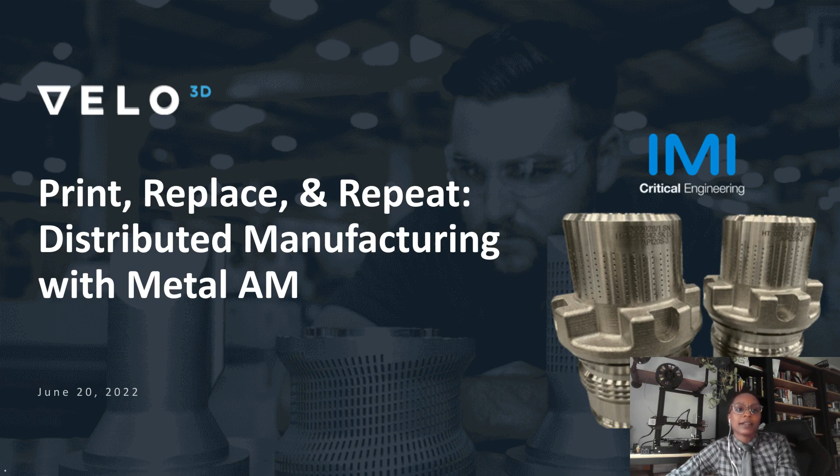Okay, so welcome to Distributed Manufacturing with Metal AM. The three main things that we're going to cover today are: number one, what's required for distributed manufacturing; number two, a quick overview of the Velo 3D products; and then in the second half of our presentation, Sid is going to talk to you all about a case study around this specific application.

So printing the same part twice is really deceptively easy. It's actually a more challenging thing than most people would think to consistently repeat the same part exactly from machine to machine and location to location, and then to also take that consistency and scale it on a massive fleet of machines. So if it's that challenging, how are customers expected to be successful in serial production? And from serial production, that's how we gain more industry-wide adoption.

So first, I want to talk about standardization, where the focus is really around part repeatability. So there's two ends of the spectrum for standardization. Number one is the industry level. So that relates to standards developed by industry bodies like SAE, ASTM, SME, those types of things. And then there's also the manufacturer level standardization, which refers to more site-specific standardization. Think more along the lines of vertically integrated OEMs or your local contract manufacturers that have some machines.

So this manufacturer level standardization tends to describe workflows and processes that allow you to make the same part repeatedly. And when we refer to manufacturer level standardization, a lot of the times people tend to think about the QMS that a lot of these industries use to execute these manufacturing workflows. So the site-specific manufacturing certification is really challenging due to the architecture of a basic laser powder bed fusion system. This more traditional architecture allows for a lot of variability because it's very operator dependent.

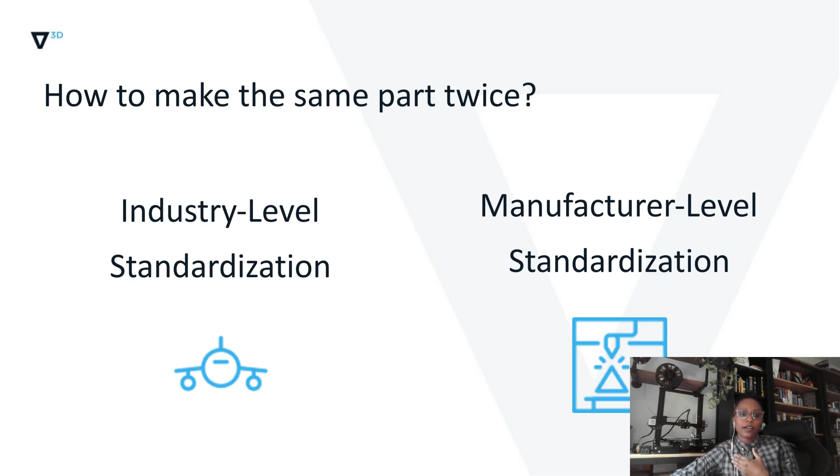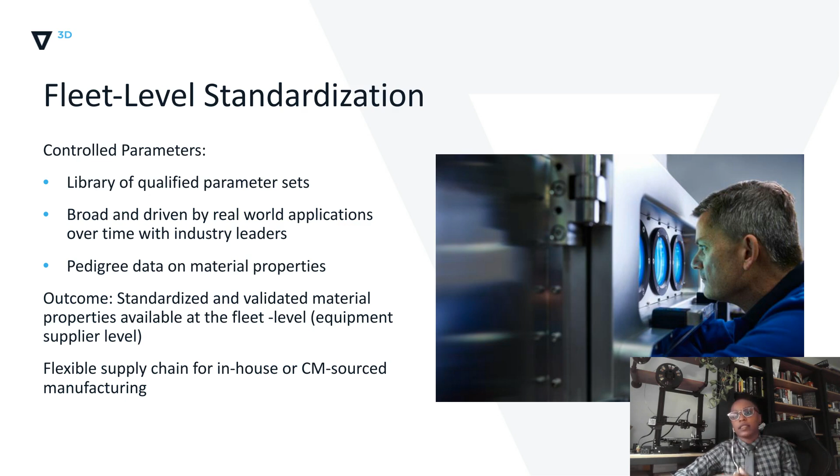So we focus a lot on fleet standardization. Fleet standardization falls somewhere in between industry level and manufacturer site-specific level. It's a system from the ground up that creates an architecture specific and designed for serial production so that we can repeat our parts over and over consistently. One of the ways we do that is using controlled parameter sets - revision controlled parameter sets as opposed to an open architecture that allows you to change and develop and tweak things like laser power and speed. With that controlled parameter set, you get material validation that we also provide, and because of that, you're able to print a given part, the same part, no matter where you go.

We have a golden build file, which is essentially what we provide. So if you come to us, we create the golden build file, or you create your golden build file and we've checked it and certified that it's good. That golden build file is just a set of instructions that can be distributed to any of these Sapphire systems geographically and executed to deliver the same end result. This gets you a lot closer to standardization than what you can get with an open architecture system where you're allowed to play around with those parameter sets.

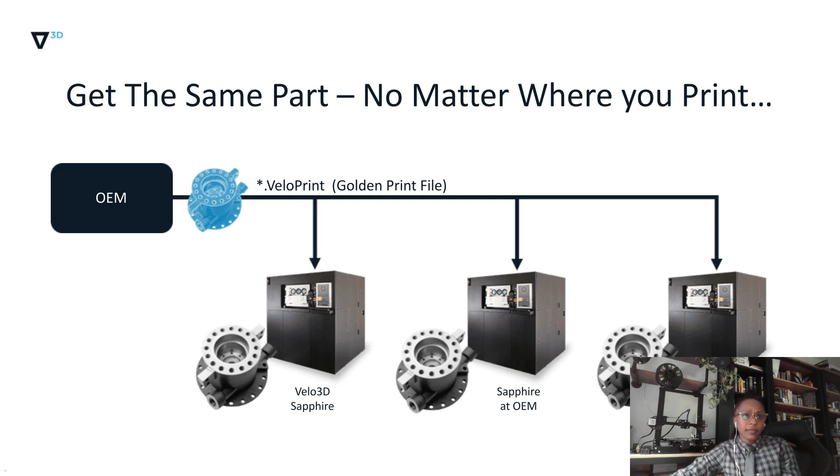So we brag that we provide the end-to-end solution, and I just want to clarify that we provide the end-to-end printing solution. At our core, we are a process company, and that's how we've developed our capabilities. We've developed 3 tools essentially to make this process work. Number 1, you have our print preparation software. Number 2, you have our Sapphire tool. And number 3, we also offer our Assure quality validation software.

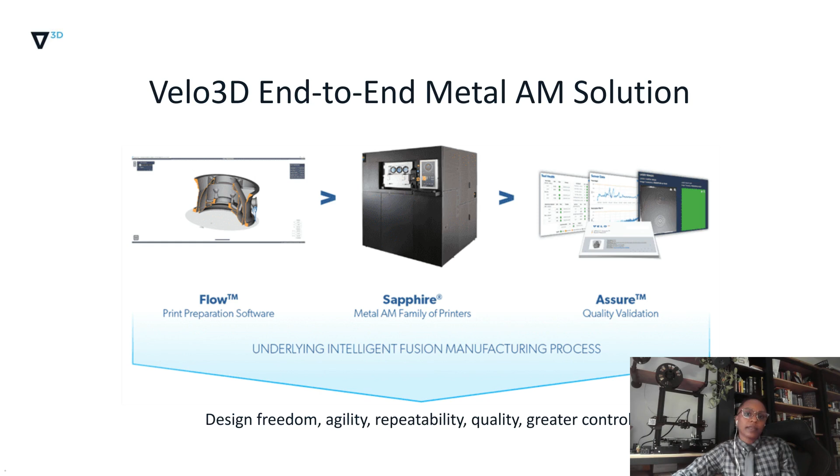For the Sapphire printer family, we are a manufacturing technology company that was founded in 2014. We're also listed on the New York Stock Exchange. The Sapphire printer family is currently composed of the Sapphire, which is the normal size, and the Sapphire XC, which stands for extra capacity. I'm happy to say we now offer both of these in the 1 meter Z build height. The Sapphire family of printers all use the same software, run the same processes, and use the same materials to ensure repeatability and consistency across our fleets. These machines were made with serial production in mind.

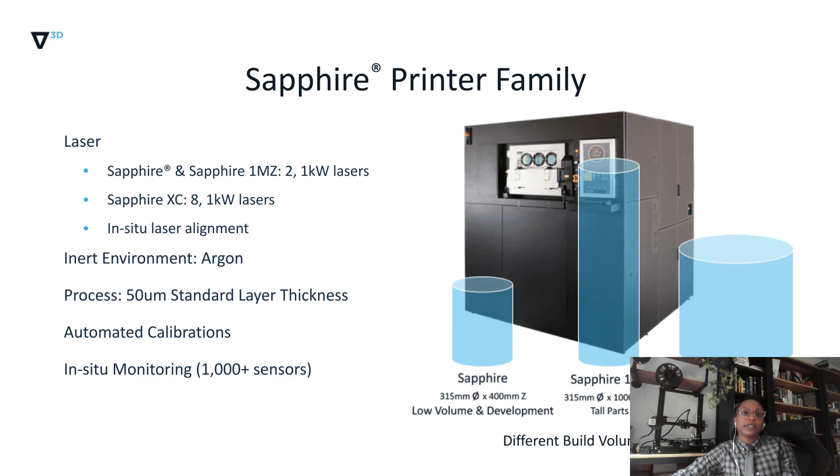And so speaking of materials, most of our material releases have been driven by our aerospace and defense customer base. We've been very focused in the aerospace and defense sectors, but we've seen applications start expanding into heavy industries like oil and gas or power generation. And that's where this upcoming case study is actually focused.

So in the heavy industries, we're seeing a heavy reliance on distributed manufacturing for maintenance, repair, and overhaul of their systems. The valves in this case study are a really good example of how you can leverage the distributed supply chain, printing geographically anywhere in the world. And with that, I'm going to hand it over to Sid.

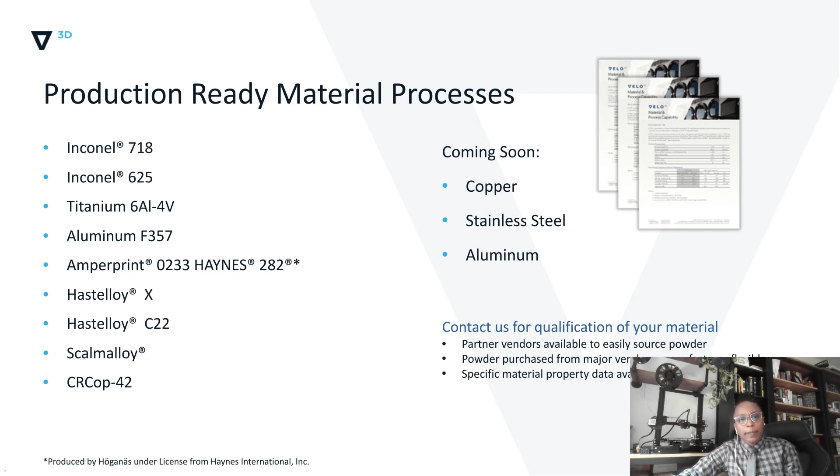Thanks, SJ. I am going to take a moment and take control. All right, so it's great to be here. Thanks for making the time to drop in on the webinar here. I'm excited to get into this.

As SJ mentioned, I will be talking a little bit more about a case study that illustrates this concept of distributed manufacturing. And the way that we'll do that is we'll talk about a specific application that we've worked on with one of our customers, IMI-CCI in this case. The part here that we looked at was the multi-stage trim valve. Essentially, that's what you're looking at here in this photo, and we'll talk through that as a case study on our distributed manufacturing topic.

So a couple of things about this multi-stage trim valve. The component itself is extremely unique in that it is a cylinder of metal, and it has, as you can see, a lot of tortuous paths that go from the ID of the part to the OD of the part. Essentially, the paths provide good flow control in some very demanding oil and gas applications. You have a very large required pressure drop across the part, and you need to be able to meter or control flow or fluid through this valve without having extremely high velocities that result in things like erosion, vibration, and noise. The way that works is this component has a plunger inside of it that blocks and unblocks different levels as it moves through the paths so that the fluid can flow from the ID to the OD.

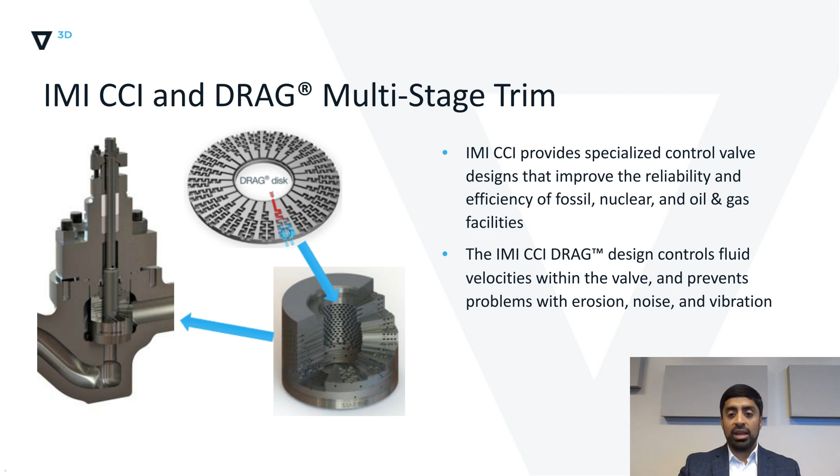When you think about the legacy manufacturing process for these valves, in traditional manufacturing they're manufactured as disc stacks. So basically what you're doing is you start with a circular hunk of metal and you're either milling or plunge EDMing these paths into your discs. And then once you have a series of discs, you line them up and you braze a stack of these discs together to create a full part.

As is the case with any manufacturing process, there are some pros and some cons. On the cons side, when it comes to brazing, there can be challenges during post-processing as well as during operation in some pretty demanding environments. As far as the pros go, these parts can be highly customizable, so the flow paths on the internals are optimized and dictated by very specific applications intended for different fluid viscosities, different pressure drop requirements, and things like that.

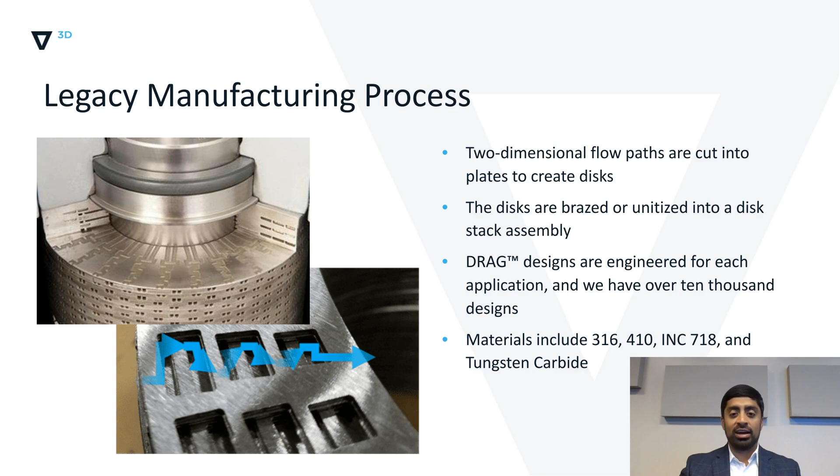At the end of the day, as you describe this part, you start to realize what unique aspects make it a great AM candidate. For one, we see benefits when you go to AM with this component because you eliminate the brazing process, which can be a potential failure mechanism that impacts and reduces the lifetime of the product. You can customize these further, maybe build some more functionality into the part at a reduced part price relative to its complexity when compared with a conventional manufacturing path.

And most importantly, you see a lot of supply chain benefits because there are a lot of these valves that have unique flow paths for different applications. When you start to think about stocking them, that becomes a big challenge because this is a low volume, high mix part that you basically need to stock for each unique geometry that's out in the field in service.

And so this is exactly the reason why this part is a great case study for us, Velo3D, as well as our customer, when it comes to examples of how AM, and specifically Velo3D, is enabling these concepts we talk about related to digital warehousing and distributed manufacturing.

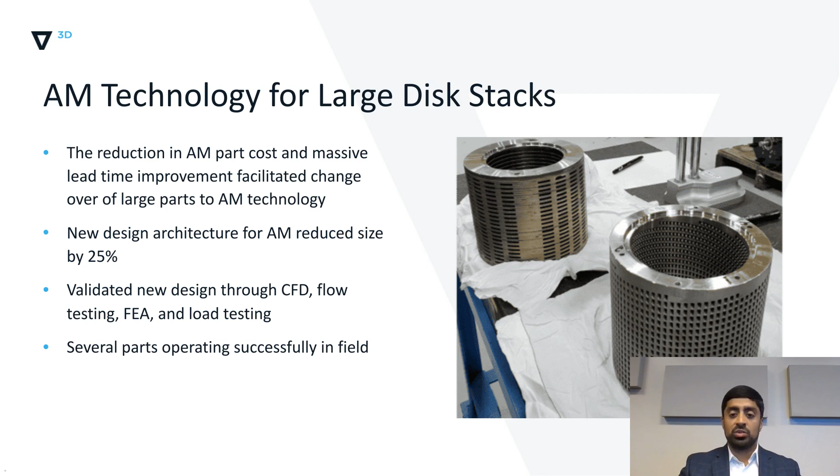With all that said, in terms of the great things about AM and the benefits, you have to talk about certification challenges. Production implementation isn't as easy as just printing a few parts. When you transition from a conventional manufacturing process like brazing to AM, that comes with its own unique set of challenges. One of the major challenges for AM specifically, when we talk about the heavy industry space, is that the requirements and the bodies tend to be very conservative.

Personally, I come from an aerospace background, so I am familiar with that flavor of conservatism. But these requirements, I have realized, are quite different. In this industry, the geometries may not be overly complex, but the operating environments are extremely challenging, including prolonged exposure to hot and corrosive chemicals like hydrogen sulfide. Because of that, these types of requirements have already been considered and vetted deeply in this industry, and now you have to reapply all of that to AM.

So not only does the performance need to be tested, but we need to thoroughly vet our mechanical properties in order to qualify this part for service.

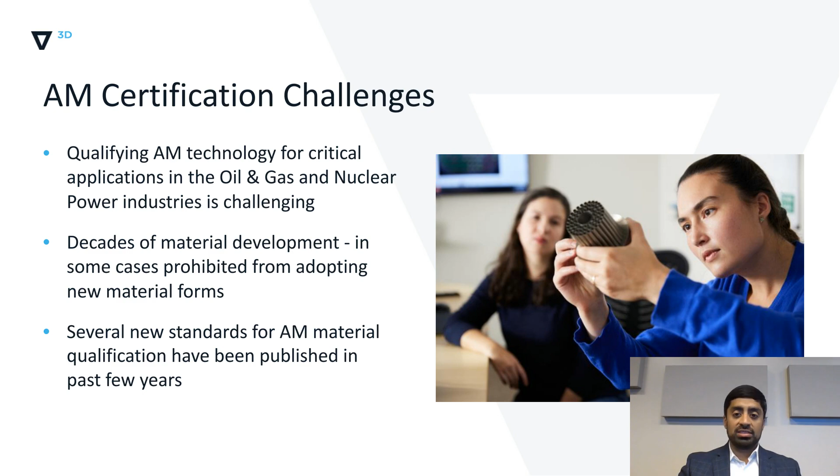As I mentioned, we worked with IMI Critical Engineering for this part to run through a complete qualification for one of these disk stacks. Keep in mind that this is an ongoing study at the moment. So we'll be sharing quite a bit today, but in the coming weeks we will be releasing some compelling data that speaks to the field performance of these parts over time, as well as the manufacturing process repeatability for these components when it comes to machine-to-machine repeatability at systems located at several contract manufacturers all over the world.

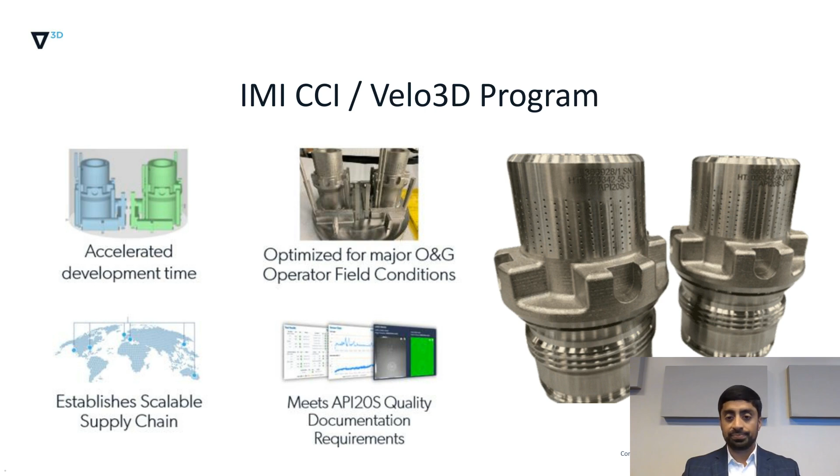So for this project specifically, we needed to meet our customers' requirements when it comes to the material qualification. In this case, it means the mechanical properties and the corrosion resistance of the material that we're printing.

The Sapphire qualification, or printing parts and coupons on the Sapphire platform per the requirements defined in API 20S, which is a standard released by API, the American Petroleum Institute, that specifies the requirements based on part criticality that need to be met in order to qualify the AM process for metal AM components in the oil and gas industry. And then lastly, part qualification, which means that the part performs and functions per its design intent for that application.

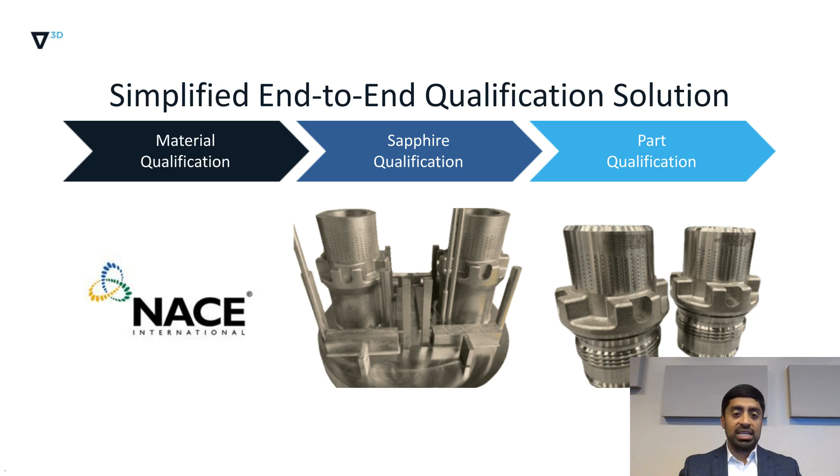So starting with the material qualification. One key differentiator for Velo3D is that we are committed to doing a lot of the mechanical and material property validation for our metal AM process and providing that to our customers free of charge. We want to provide control parameter sets to our customers that are printing real parts, not just test bars and test geometries, and these control parameter sets are tied to material properties that have been vetted by industry organizations that our customers rely on for qualification.

In this case, for our 718 process, we are working with our customers to establish compliance with NACE requirements, which govern a lot of the corrosion susceptibility for components and make sure these parts are well suited to withstand very harsh environments.

And in practice, how do you do that? The way we're approaching it is through rigorous amounts of corrosion testing. Even though there isn't necessarily an AM standard for NACE, we're fairly optimistic that by going through the same testing as a conventionally manufactured part, we can achieve that NACE compliance for our AM process. So we work with our customers to help define these test matrices and work through that.

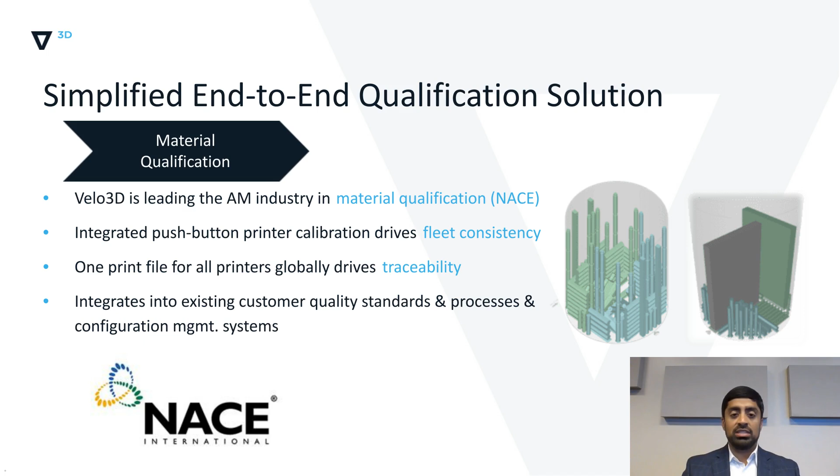Next, in terms of the Sapphire qualification, we worked with our customers per the API 20S spec to determine the criticality of this part and followed the appropriate requirements. So API, for example, API AMSL level 3.

Let me back up. API defines three different levels of criticality for a component. And the highest level of criticality, which essentially takes down a well or leads to a refinery stopping production, is AMSL3. That's the requirement you set in stone and start with.

In addition to the AM component itself, for one of the first times in a production context, we were also able to test the API 20S standards by going through the full validation of the feedstock, the print process itself, and the post-processing and testing, all three of which are critical to your qualification.

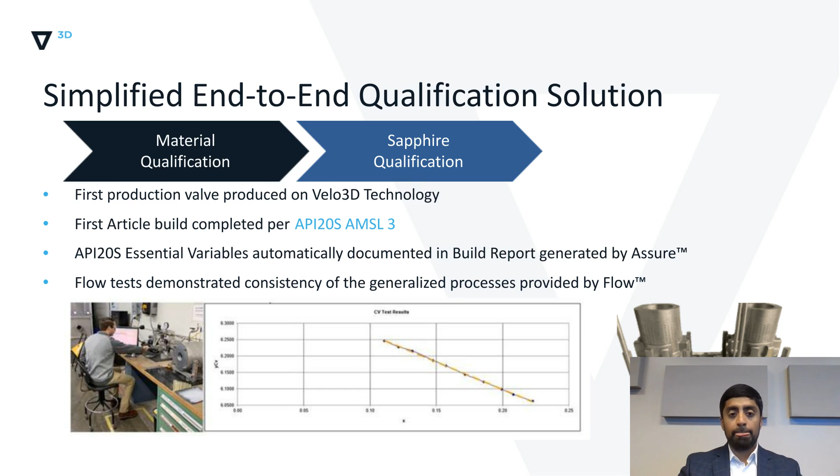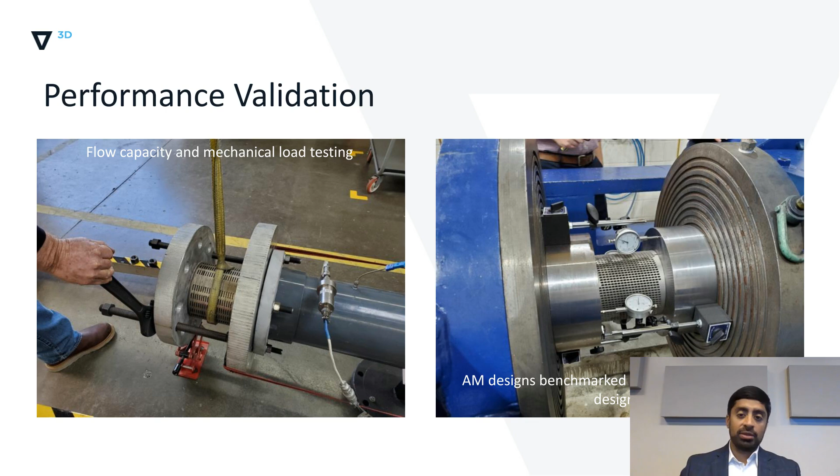One of the key enablers on our system that helps the Sapphire qualification is the Assure tool, and I think it's something we don't talk about enough. Assure is Velo3D's quality assurance and validation software, providing an in-depth look into calibrations, which is key for repeatability, especially with digital warehousing and distributed manufacturing. Our machines can self-calibrate, especially in the optical system, which is something we need.

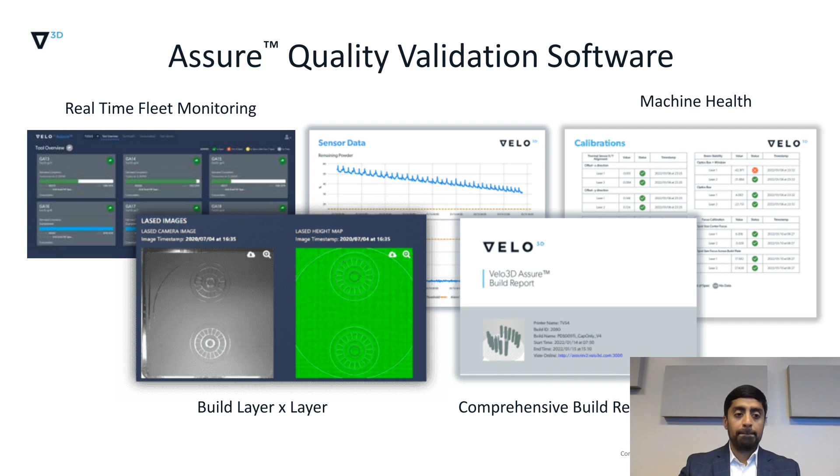Finally, in terms of part qualification, as I mentioned, the parts that we're seeing here are in production per API 20S. They're installed in wells and accumulating use. We've seen some good initial results in terms of nominal performance. They're also seemingly showing better durability, longer life versus their conventionally manufactured versions.

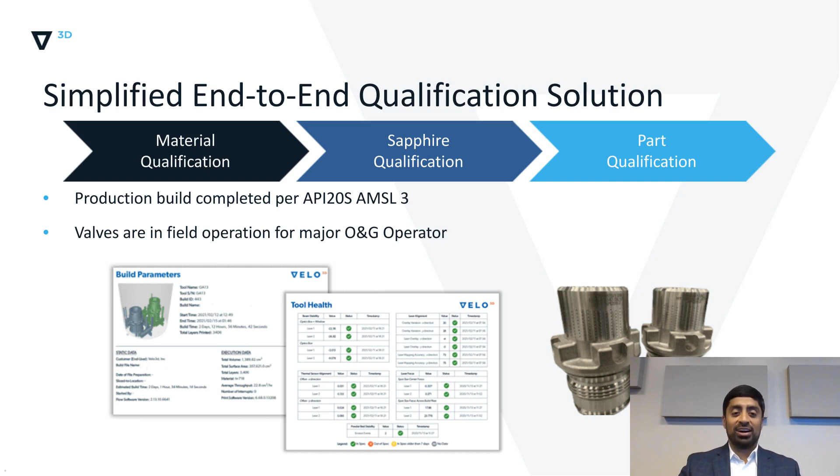As I said, this is a snapshot of an ongoing effort, so it seems promising thus far. But earlier I mentioned that follow-on work we are doing, we're using that to build more depth into the part qualification system. I think we've seen some initial success, and we're optimistic that story just gets better with time as we accumulate more time in service for these components.

But I think the more important takeaway here is that there is a way to get to scaled production when you start to talk about digital warehousing and distributed manufacturing with AM. And that's where we're working towards - that's where Velo3D is working towards that reality.

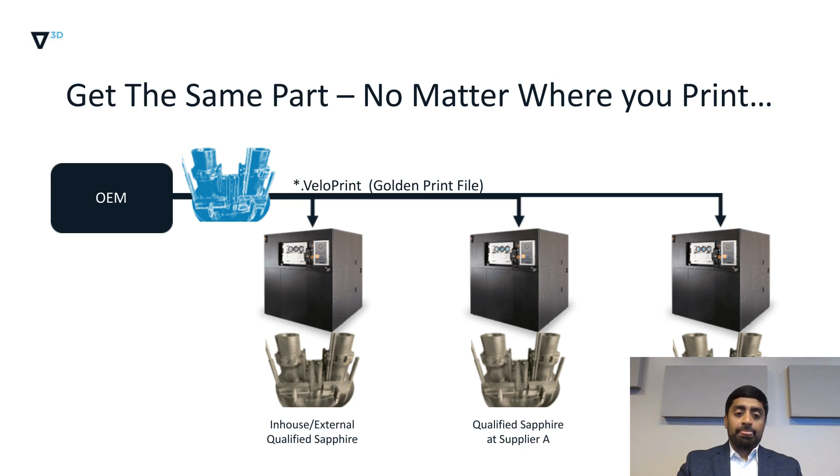And to further that even more, I think overall we're finding that it's not just applicable to printing the same part over and over, but in a case study like this with IMI Critical, it's applicable to parts that have thousands of different part numbers in that same part family. So from our perspective at Velo3D, it's becoming a way to get scaled production when it comes to metal AM, not just across different parts, but even different part families.

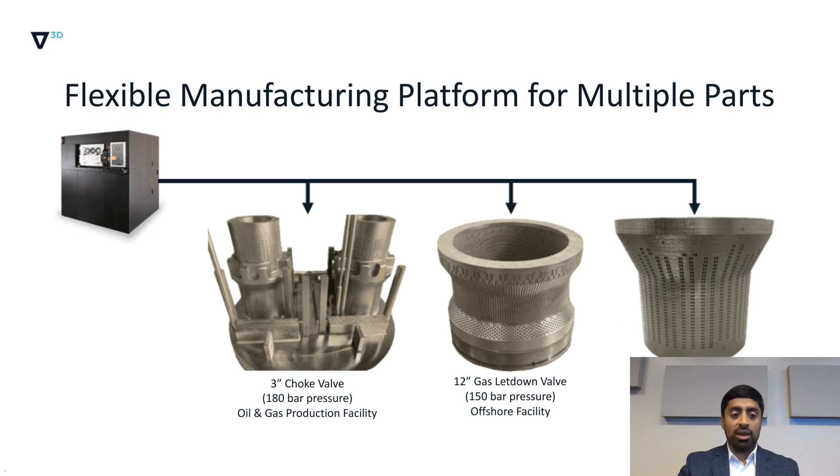That's all we had on the case study. Laura Lynn, I'll transition it back to you for questions.